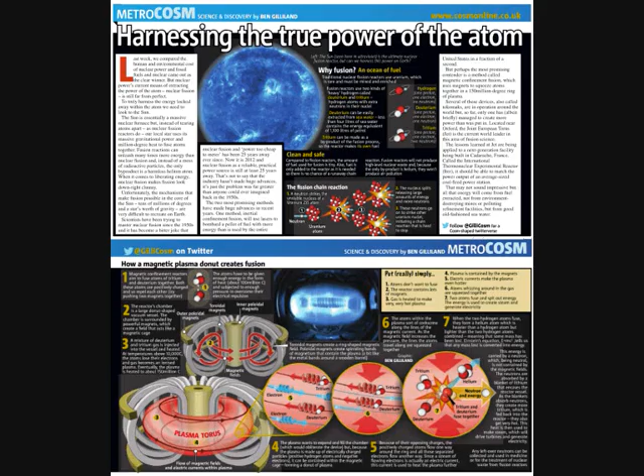Recent news suggests German scientists may have had some success with fusion, which in theory mimics the power of the sun to produce energy, and does not have some of the dangerous side effects of fission, although holding a small star in place is not easy nor particularly safe.

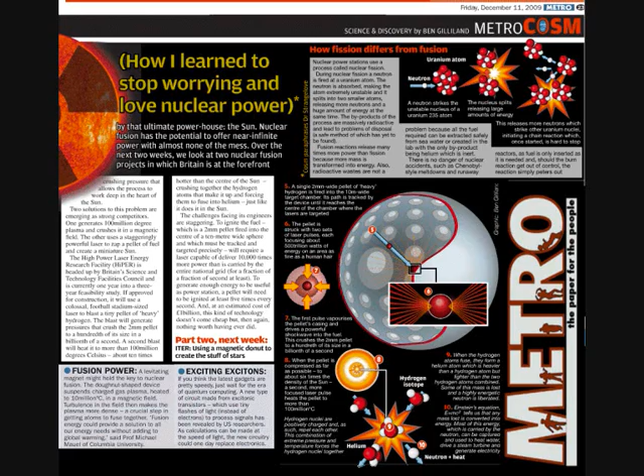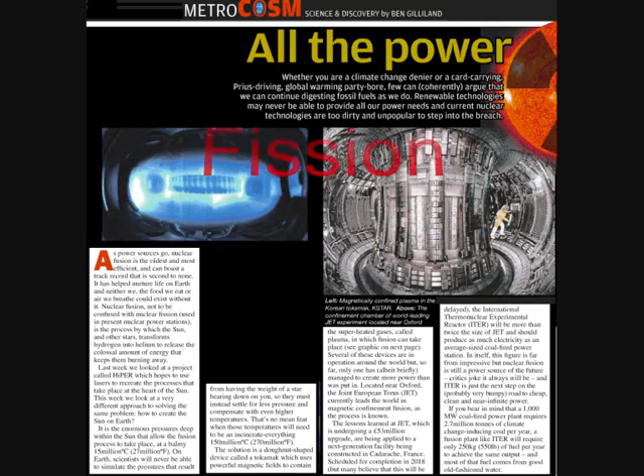We have potentially two types of nuclear system that can supply energy: fusion and fission. Fission creates radioactive elements that then have to be reprocessed. This also creates a security hazard, as nations can use this to create nuclear bombs.

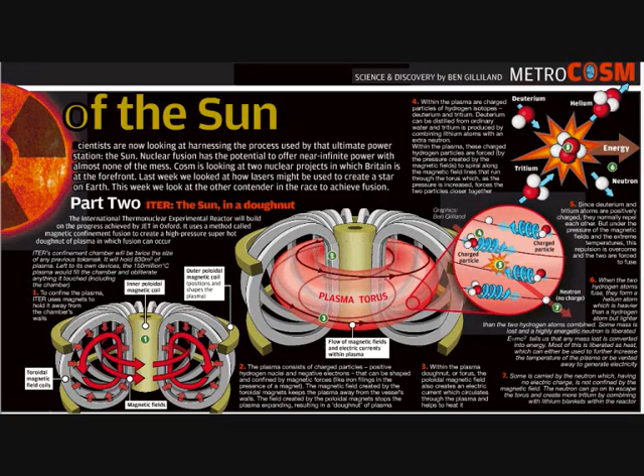Fusion exploits the power of the sun to supply nuclear energy and works in the same way as our star. In principle, this is a better system, but no one has managed to render it stable and usable except for Tony Stark.

The national power grid also keeps people beholden to the power companies, and there is no way one can put a nuclear power station in one's own back garden. So in order to get away from centralized control, and in order to supply energy that will always be available, we need renewable sources now, not when someone comes along with the genius of Tony Stark.

We cannot wait. According to physicist Brian Cox, even if we had fusion power available, this still would not supply the energy needs for the future.

Local personal energy supplies are off-grid. Both remove centralized control and paying bills, and are far more efficient because sending central power around the grid loses energy through kilometers of cable resistance, which is why it is thousands of volts when it leaves the source and hundreds of volts when it reaches homes, and has to be reduced again to power most electronic equipment to 12 volts or so, losing power to heat in the process.

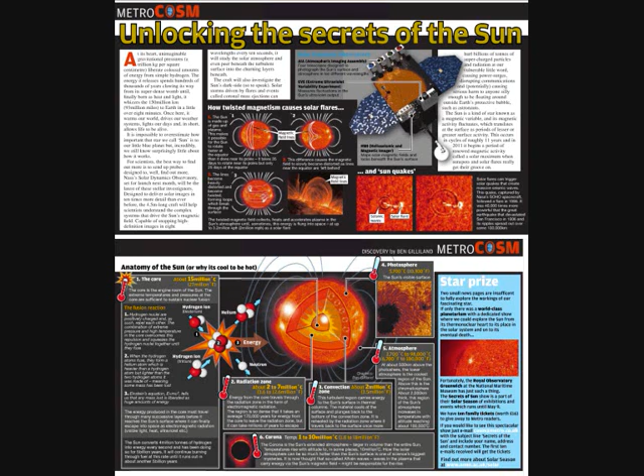Renewable power never runs out, doesn't lose power to a grid, and is therefore more efficient. It stops ongoing bills from having to be paid, though it may require initial investment.

Renewable power is fairer for the individual and enables them to control their own power use rather than being dictated to by large corporations. Indeed, one can end up selling excess power to the national grid and profiting from one's own production.

There are some difficulties involved in going off-grid, including the initial financial investment and planning permission. Notably, some of the processes involved in creation of such things as solar panels and wind turbines involve metal and plastic processing, which themselves rely on oil and electricity for production.

It may be that we have to return to building from wood as ancient water wheels were, which is replenishable.

One of the benefits of renewable power is it needn't be part of the national grid. It could be solar panels on a single house in the middle of nowhere, a windmill on a farm, or it could be actually attached to the device that it needs to power, as in the case of solar cells on calculators, or indeed a solar-powered car.

Muppet Labs at MTVCA has undertaken some experiments with respect to renewable energy in the fields of wind, hydro, solar and chemical.

Obviously we're not going to mess about with nuclear, although apparently making your own fusion reactor is child's play, not that we are going to attempt it. We will now show some of the experiments that the MTVCA has carried out.

Wind power is now one of the most cost-effective methods of electricity generation and one of the fastest growing. A total of 31,000 megawatts of wind generating capacity had been installed by the end of 2002, about 4 times the capacity at the end of 1997, an annual growth rate of 40%.

The Earth's wind systems are due to the movement of atmospheric air masses as a result of variations in atmospheric pressure, which in turn are due to the uneven solar heating of different parts of the Earth.

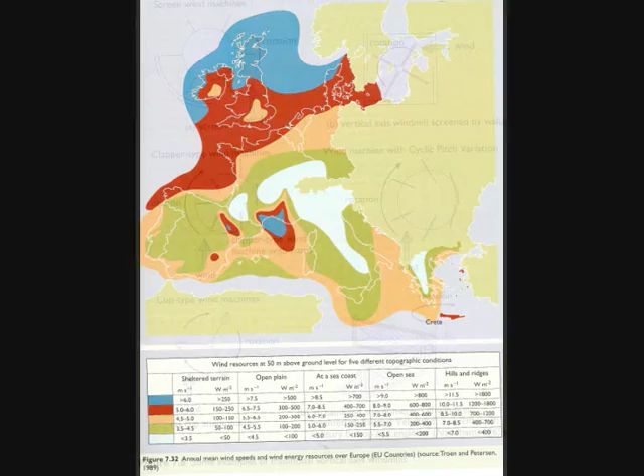Wind energy was one of the first sources of energy to be exploited by early civilizations. Windmills are believed to have existed for over 4,000 years. Many early windmills were of the vertical axis type and had a variety of designs. The more familiar horizontal axis windmills appeared in Europe in the 12th century. These traditional machines consisted of radial arms supporting sails that rotated about a horizontal axis. Before the Industrial Revolution, it is estimated that there were 10,000 of these windmills in Europe.

Modern wind turbines can be of the horizontal or vertical axis type, and a variety of designs have been proposed over the years.

One of the first projects we undertook was to develop a small-scale portable wind turbine suitable for charging AA-size batteries. This device provides an alternative energy source using free energy from the wind. The aim was to construct this using recycled materials as far as possible.

The range of devices which use power in this form is large and growing, from mobile phones and digital cameras to remote controls and battery-powered clocks. We discard millions of batteries every year, and even when we use rechargeable cells, charging them from AC mains is a very inefficient way of using energy, as much of it is lost in the transformer.

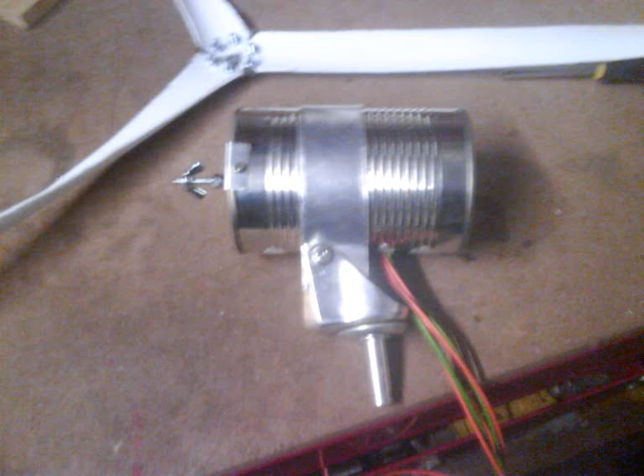Any renewable energy device requires a certain amount of energy to manufacture it, so a key measure of such devices is the return on energy invested. The device has to generate the same amount of usable energy as was used to manufacture it before it starts paying for itself. By making use of recycled materials, less energy has to be invested in constructing the device, and this also gives a new lease of life to discarded materials which would otherwise end up in landfill.

The dynamo is the bottle dynamo type used on bicycles, which can be obtained for a few pounds. The housing for the dynamo is made from packaging containers, standard size food tins, pop bottles, or offcuts of drainage pipe. The blades are made from a length of plastic drainage pipe about 7 cm in diameter and 30 cm in length. The pipe is cut into 3 sections using diagonal cuts, so that the section gets narrower and is offset at the narrow end.

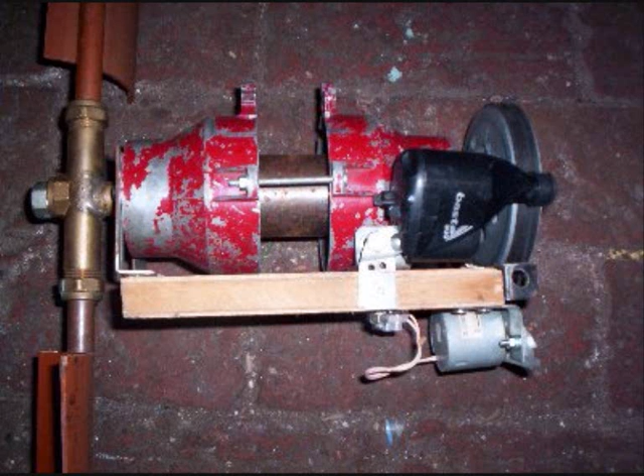This creates a twist in the section which forms the aerofoil. The blades are coupled to the axle by attaching them to a short piece of plastic tube. We want the turbine to be able to pivot horizontally so it can turn into the wind. To achieve this, the housing was mounted on a pivot made from a caster removed from a piece of old furniture. The wheel was removed and the can is fixed to the caster using a band of metal.

A tail fin is made from a piece of sheet plastic and attached to the back of the housing to help the turbine turn into the wind. A small hole drilled in the side of the can where the caster attaches allows the wires attached to the stator coils to exit the housing.

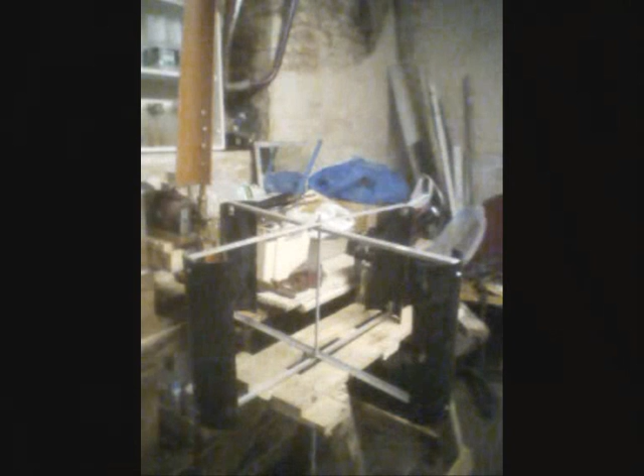The caster is attached to a wooden support pole by means of a hole drilled vertically in the top of the pole. A cross piece provides a base for the support. Guys are attached to the pole near the base using picture hooks. These should be low enough so that there is enough clearance for the rotating blades when the ropes are fully extended.

When the turbine is deployed, the ropes can be secured to the ground to provide stability. The output from the dynamo is alternating current, so a rectifier circuit is required to convert this to direct current suitable for charging a battery. The turbine bought with the You Choose grant has been deployed and is under test, although we don't have a decent regulator for its three-phase supply yet.

Over Christmas 2015, the UK has suffered flooding in many areas. With such large quantities of water dropping, it makes sense to collect it and use it as a source of hydropower.

Over the past few months, what has been evident in the UK is a large amount of wind and truckloads of water, so much water that it has flooded areas of the UK. Some have put this down to housing being built on floodplains, which is no doubt true, and that the government has been lax in dredging rivers, which is also true.

What may also be the case is that the floods are the consequence of global warming, which has caused sea levels to rise, raising the level at inlets and at the coast. It is relatively safe to say then that the UK has sources of wind and water in abundance, and along with the turbines collecting wind, we can have water wheels gathering power from water sources.

Moving water was one of the earliest energy sources to be harnessed. Irrigation systems existed at least 5,000 years ago, and it seems likely that the earliest water-powered device was the noria, used to raise water for this purpose. This device appeared in the Middle East and Far East earlier than 600 BC.

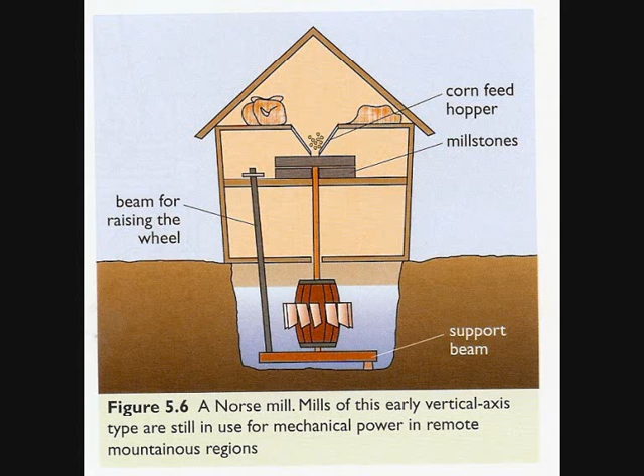The earliest water mills were probably vertical axis corn mills known as Norse or Greek mills. These appeared during the 1st century BC in the Middle East and a few centuries later in Scandinavia. In the following centuries, increasingly sophisticated water mills were developed throughout the Roman Empire, the Middle East and Northern Europe.

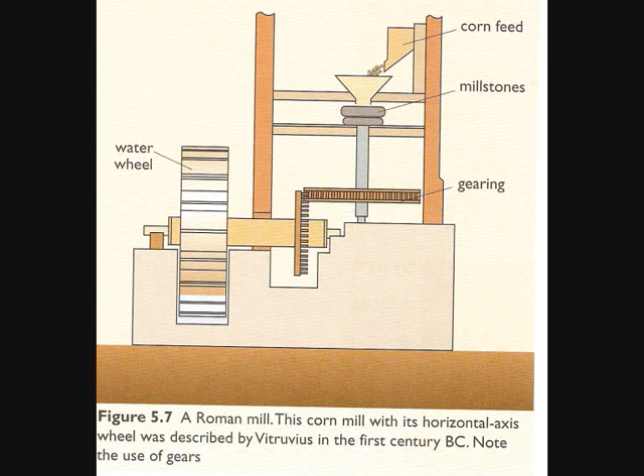The Domesday Book recorded over 5,000 water mills, suggesting that every sizable settlement had its own mill. During the following centuries, water became the main source of mechanical power for mining, ironworking, papermaking, and the wool and cotton industries. By the end of the 17th century, England had 20,000 working mills.

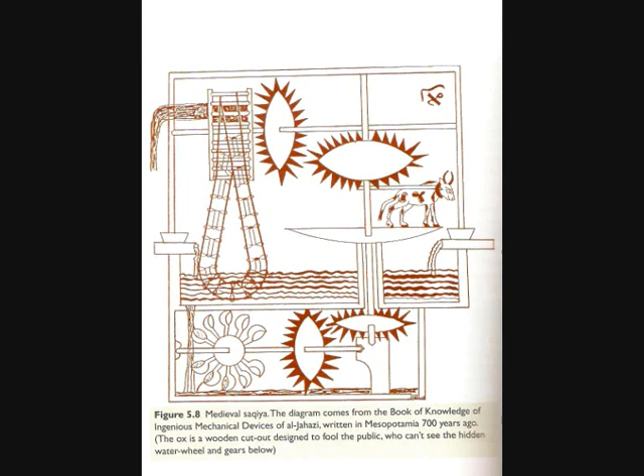Up until about 1800, investigations were made into different designs. The overshot wheel is driven by water falling from above, on blades with closed sides. It requires a head of water at least as high as the wheel diameter. The undershot wheel is driven by the pressure of water against its lower blades, which dip into a flowing stream. It can be run from almost any stream, but becomes inefficient if the water backs up due to flooding.

The breastshot wheel has the water channeled so that it strikes the blades at about the level of the wheel axle. It is a compromise between the two and overcomes the flooding problem without requiring such a high head as the overshot wheel. A number of developments took place in the 19th century, which led to the development of hydroelectric power.

In 1832, a French engineer named Benoit Fourneyron developed the first successful water turbine. This was a vertical axis machine in which the turbine runs completely submerged. Guide vanes inside the turbine direct the water flow onto the moving blades, ensuring the smooth flow of water, resulting in an efficiency of as much as 80%.

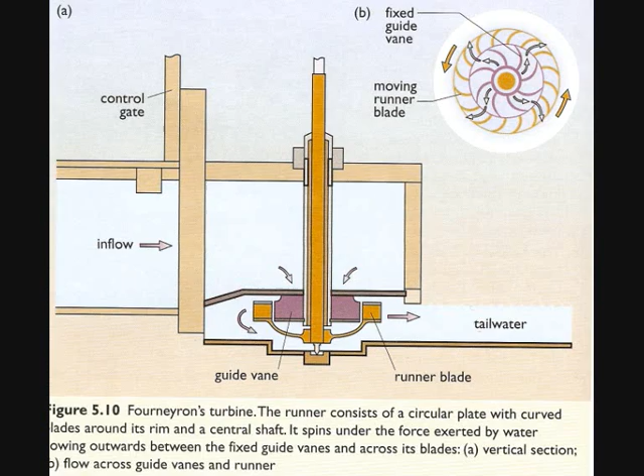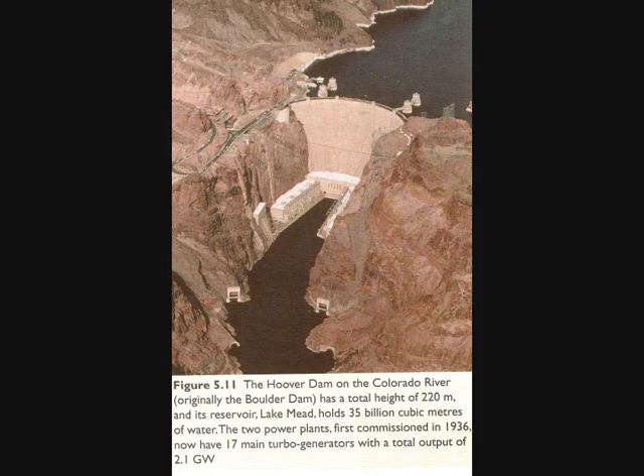By 1881, the world's first public hydroelectricity supply opened in Godalming in Surrey. The capacity of individual power stations grew to over a megawatt in less than a decade, and hydroelectric generation continues to expand today.

We have built a Pelton wheel from an old bicycle wheel and got this turning from a flow of water, supplied from a tank at the top of the hill, which collects rainwater runoff from the garage. The idea is to get this to turn a dynamo. Calculations suggest it should generate about 5 watts.

Doing it now. Got it? Yeah.

The problem with the water wheel is that the tank of water powering it is soon exhausted. In order to improve the situation, the arrangement can be enhanced using a pumped storage system.

Water from the garage roof is collected into the IBC tank to act as a source of water for the Pelton wheel.

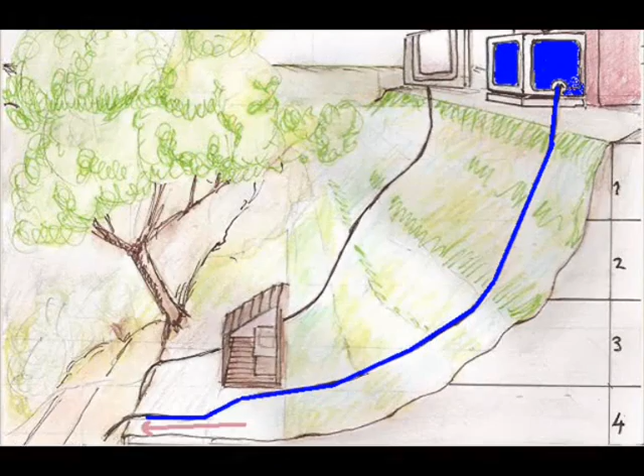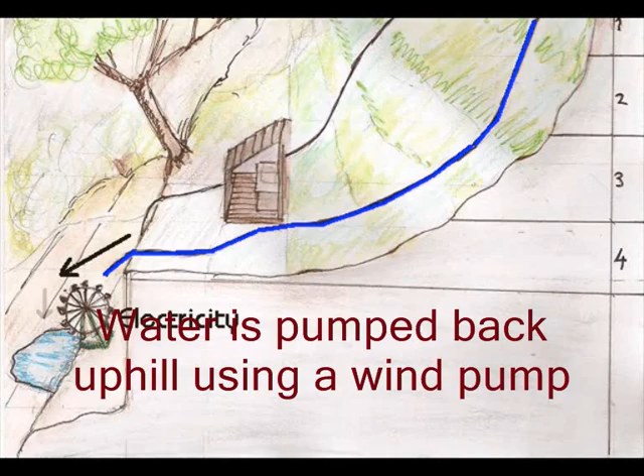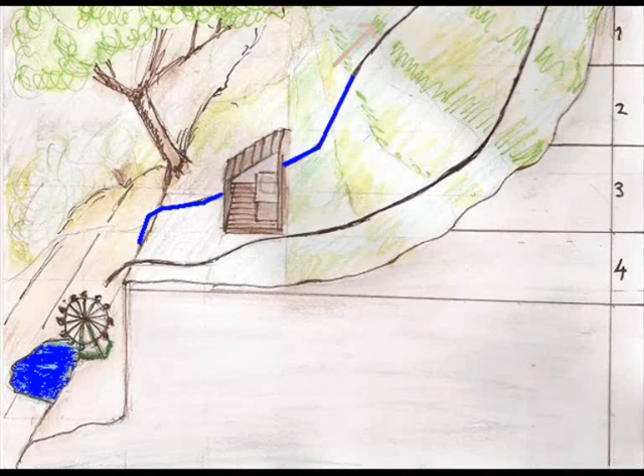Water flowing downhill from the tank initially is used to drive the dynamo in the Pelton. A wind turbine is used to pump water uphill to the tank, recreating the potential energy and resupplying the Pelton with its driving force of water. This uses wind to recover water lost from the tank in order to be released again to power the dynamo in the Pelton wheel to produce electricity. This is then stored in batteries to be tapped at will.

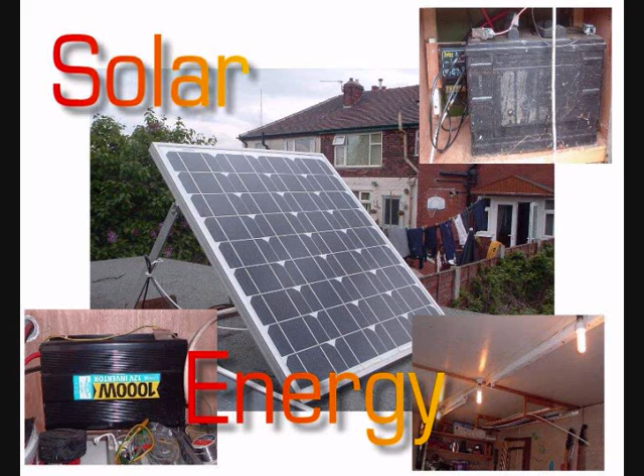There are several ways to use the sun's energy, but the MTVCA invested in 2 solar panels using the U-Choose grant, which now adorn the headquarters.

The discovery of the photovoltaic effect is credited to French physicist Edmond Becquerel, who described an experiment in 1839 in which the voltage of a battery increased when light was shone on the silver plates of the cell.

In 1877, two Cambridge scientists, W. G. Adams and R. E. Day, described variations in the electrical properties of selenium when exposed to light.

In 1883, Charles Edgar Fritts constructed a selenium solar cell similar to the silicon solar cells used today. These cells were very inefficient, converting less than 1% of the light into electricity, but they did find a use in photographic exposure meters. The breakthrough which led to modern solar cells came in the 1950s.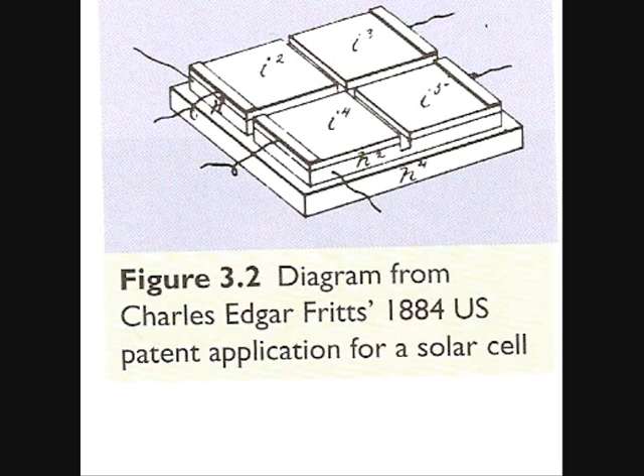A team of scientists at Bell Telephone Labs were researching the effects of light on semiconductors. In 1954, the team produced devices made from silicon which were much more efficient than earlier devices in producing electricity from light. Over the past few decades, progress has been made in improving the efficiency and reducing the cost of PV cells to the point where they can be used commercially.

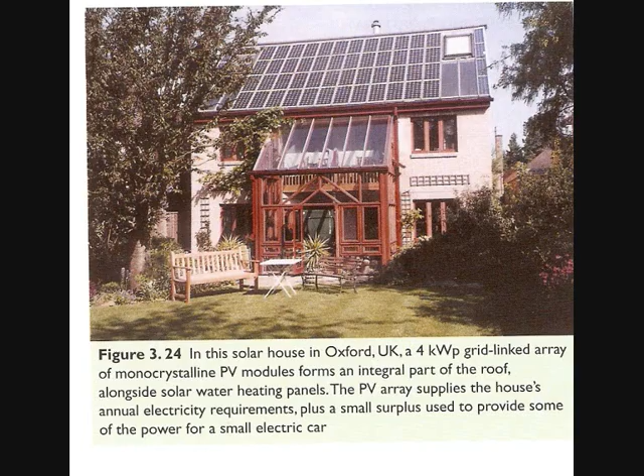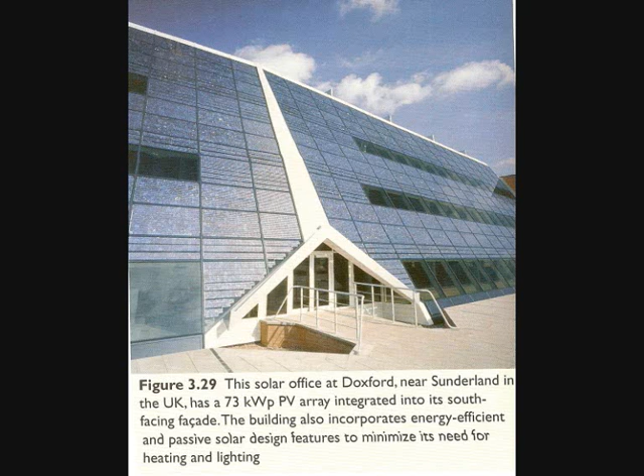A growing number of domestic, commercial and industrial buildings now have PV arrays providing a substantial portion of their energy needs. As early as 1958, solar cells were used to power the radio transmitter of the American Vanguard satellite, and have become the standard power source for modern spacecraft such as the International Space Station.

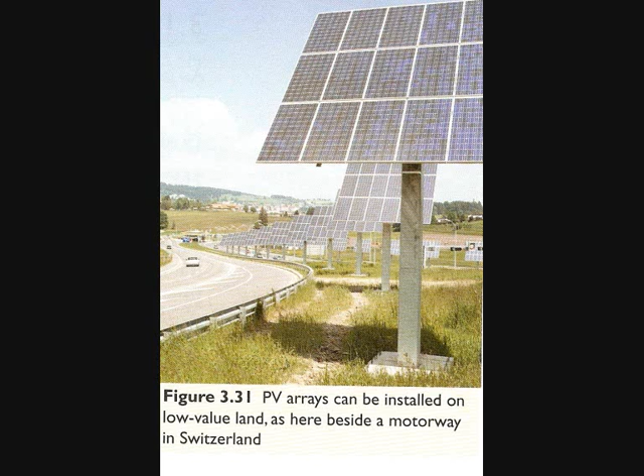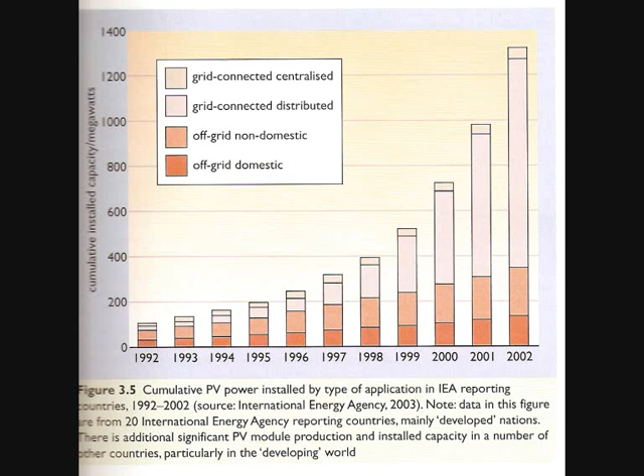As costs have fallen, the amount of installed solar generation has increased, and this trend seems likely to continue in the future. One way to make use of solar power is with photovoltaic cells. These rely on the effect of semiconductor materials to convert the energy in sunlight into electricity.

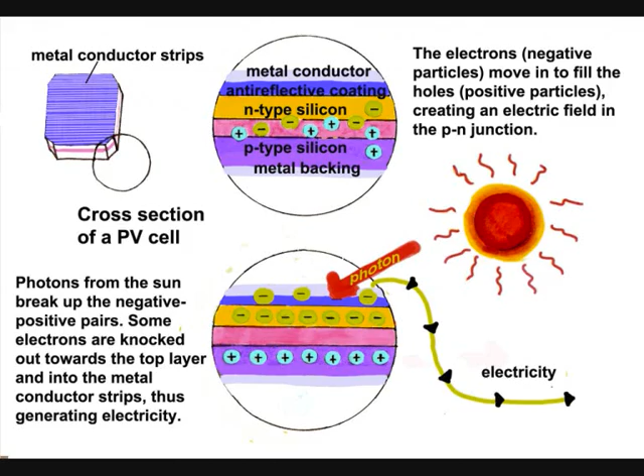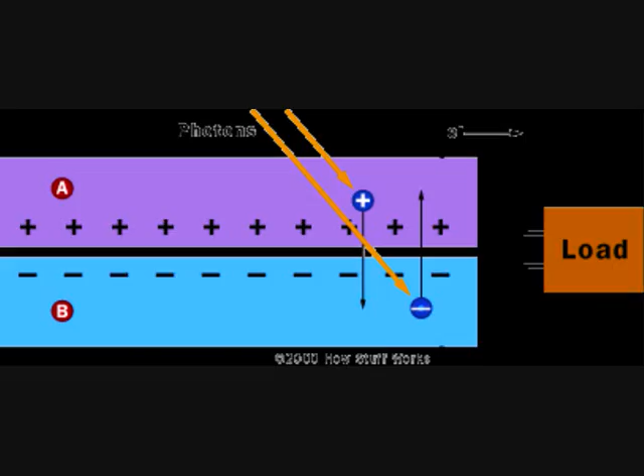A variation on this idea is the photogalvanic cell, which was developed in the 1950s. In these devices, the energy of sunlight is used to reverse the effect of chemical reactions in the battery, causing it to recharge. They have the advantage of storing energy, but so far they have not been developed to the point where they can be used commercially.

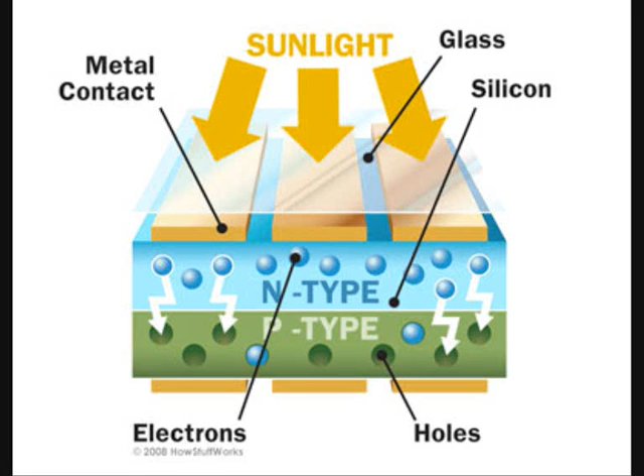With the U-Choose grant given to the MTVCA, we were able to purchase two 80-watt solar panels which were erected on the front of the house. These feed down into the cellar and into a control box which is being fabricated from an old amplifier.

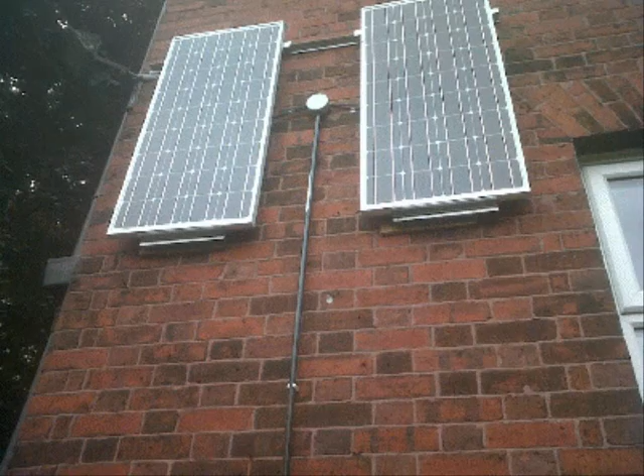Currently, one solar panel is charging the main battery which powers the LED lamps in the cellar. The case is merely a housing for experimental circuits, but at the moment is able to charge small batteries which light the hide and sheds in the garden.

Shortly the lighting in the stairwell to the basement is to be replaced by efficient LED lights. There are also small solar arrays, one of which was used at the U-Choose presentation in order to secure the grant.

If the sun's rays are concentrated using mirrors, high enough temperatures can be generated to boil water to drive steam engines. These can be used to provide mechanical work for electricity generation. These systems have a long history, and if cheap oil and gas had not appeared in the 1920s, solar engines might have developed to be commonplace in sunny countries.

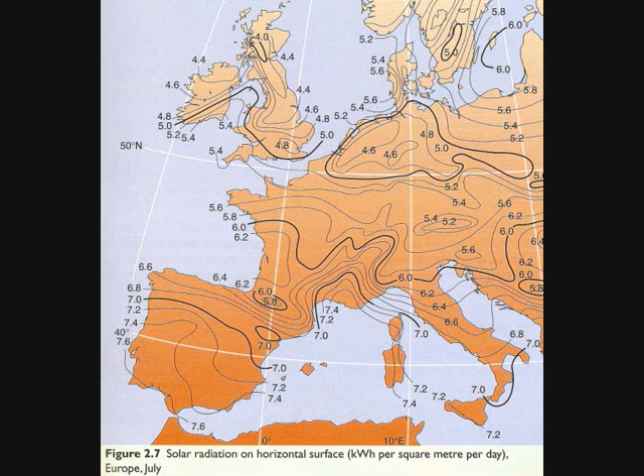The most common method of concentrating solar energy is to use a parabolic mirror. All rays of light that enter parallel to the axis of a mirror formed in this particular shape will be reflected to one point, the focus. If the rays are off-axis, they will not pass through the focus, so it is necessary for the mirror to track the sun. These mirrors can be made in either line focus or point focus.

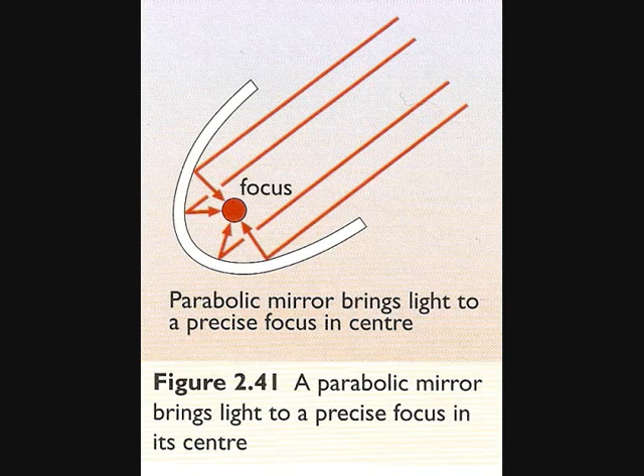In the line focus or trough collector, the mirror faces south and only has to track the sun's elevation. In the point focus form, the mirror must track the sun in elevation, up and down, and in azimuth, side to side. The process of converting this power into mechanical work started in the 19th century.

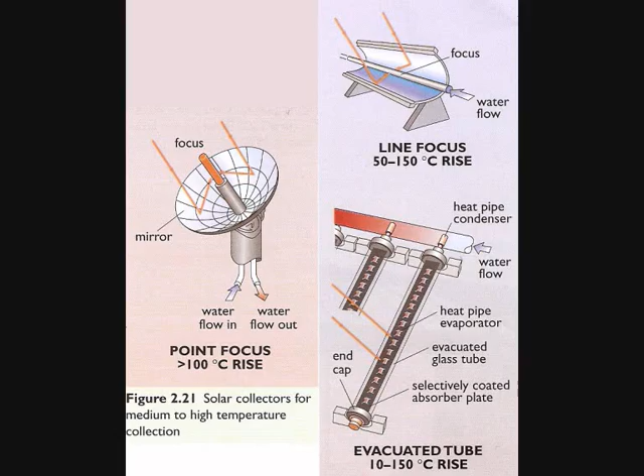In the 1860s, France lacked a supply of cheap coal. Math professor Augustin Mouchot had the answer: solar-powered steam engines. Mouchot produced engines ranging from a solar printing press to solar wine stills, solar cookers, and even solar engines driving refrigerators. The system had a parabolic reflector with a boiler at the focus. However, the engines were not very efficient, and by the 1890s could not compete with supplies of coal appearing as the result of new investment in mines and railways.

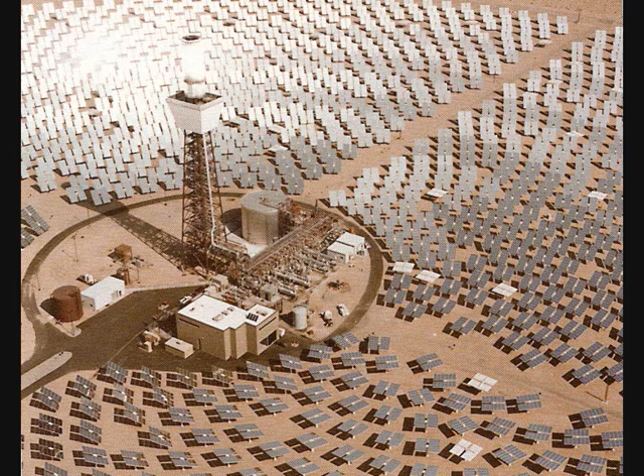At the beginning of the 20th century, an American entrepreneur, Frank Shuman, built a system of large trough collectors in Egypt. This used 5 trough collectors 80 meters long and 4 meters wide. At the time, coal was expensive in Egypt because it had to be imported, so the system would have paid for itself in just 4 years.

A more ambitious scheme involving 20,000 square miles of collector in the Sahara was planned. This would have produced 270 million horsepower, equivalent to all the fuel mined in 1909. Unfortunately, the First World War and the advent of cheap oil put an end to interest in this scheme.

It was not until the 1980s that the first serious large experimental electricity generation schemes were built to make use of high temperatures. Many of these were of the central receiver or power tower type, such as the 10 megawatt system at Barstow, California. The system uses an array of tracking mirrors which concentrate the sun's energy onto a boiler at the top of the central tower.

A power station at Kramer Junction in the Mojave Desert generates electricity commercially and produces most of the world's solar electricity. Between 1984 and 1990, Luz International brought online 9 systems of between 13 and 80 megawatts. These are trough collectors along the lines of Shuman's original design from 1913.

Instead of conveying the steam from the collector to a separate engine, some systems have the engine itself mounted at the focus of a parabolic collector. This can be a steam engine or a Stirling engine.

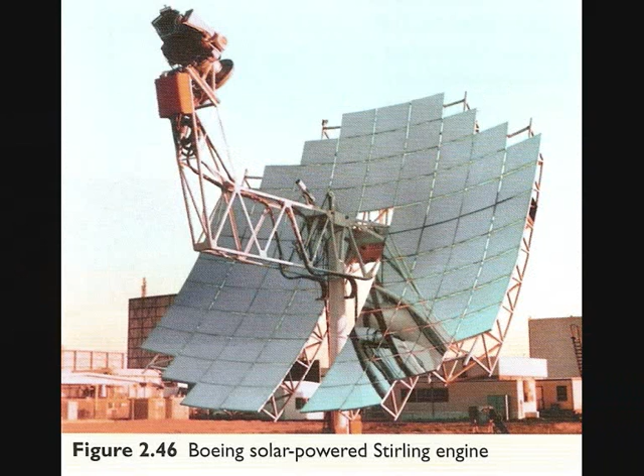The Stirling engine was invented by Robert Stirling originally to provide a safer alternative to steam engines, then being used to provide pumping for mining operations. The Stirling engine is an example of an external combustion engine. The engine consists of a hot and cold chamber, each of which has a piston, and the pistons are connected by a linkage mechanism which turns a flywheel.

Heat is provided to the engine by an external heat source which causes the air inside the hot chamber to expand. This moves the piston, causing the flywheel to turn. The hot air is drawn into the cold chamber where it cools and contracts, drawing in the second piston. This turns the wheel further, forcing the cooled air back into the hot chamber to start another cycle.

In more recent years, this principle has been adapted so that the heat is provided by a solar concentrator, and the engine turns a dynamo providing electrical power. Such systems have been exploited commercially, for example by Sunpower in the US, to provide renewable energy.

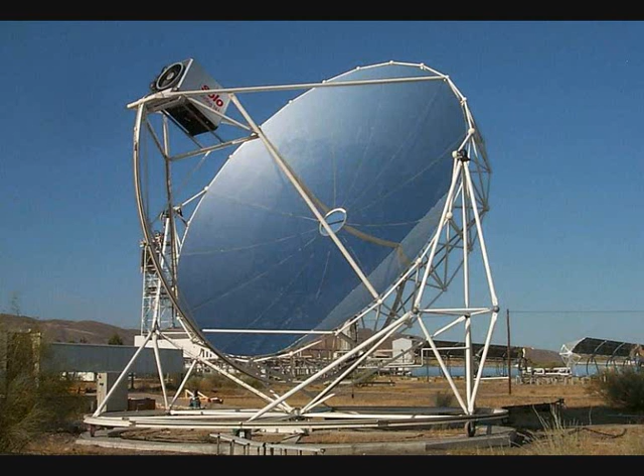These devices use a solar concentrator to focus the heat of the sun. We have made a solar concentrator from an old satellite dish covered in mirror tiles, which has proved quite effective.

A variation of the Stirling engine is the liquid piston engine or fluidine. In these devices, the pistons are formed from columns of water. They can be driven by the heat of the sun and have been used to pump water. Our own attempt at a fluidine is still a work in progress.

Another way to exploit the heat of the sun is to have it heat water up in radiators that are painted black in order to absorb its energy. In doing this, we've managed to attain water temperatures of around 50 degrees.

One of the problems facing renewable energy is that the supply is intermittent. The sun does not always shine and the wind does not always blow at the time we want to use energy. For this reason, we need a way of storing energy in a form which we can use on demand in the form of fuel.

One proposed solution to this problem is hydrogen. Hydrogen is a gas at room temperature and can be burned as a fuel in the same way as natural gas, but no carbon dioxide is produced when burning hydrogen, so it does not contribute to the greenhouse effect.

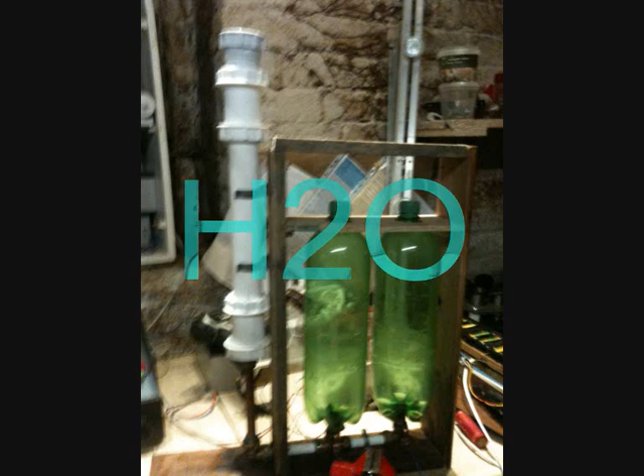The other advantage of using hydrogen is that it can be generated easily from the electricity produced by renewable resources, using a process called electrolysis. Electrolysis uses ordinary water, which consists of the chemical elements hydrogen and oxygen in chemical combination, with the formula H2O. The electrolysis process uses electrical energy to split the water molecule into its component parts, releasing the gases hydrogen and oxygen, which can be stored for later use as a fuel.

When these gases are brought together again, they combine in a combustion reaction, releasing the stored energy as heat. The only byproduct of this is water vapour, which can be safely released into the atmosphere. The heat energy can be used directly to provide heating or used for motive power in an engine or gas turbine. The hydrogen and oxygen can also be consumed in a device called a hydrogen fuel cell, which produces electrical energy directly from the chemical energy stored in that fuel.

The standard laboratory equipment for electrolysis is called a Hofmann apparatus, but you can get the same results using homemade equipment based on simple materials such as a home brew kit or even pop bottles.

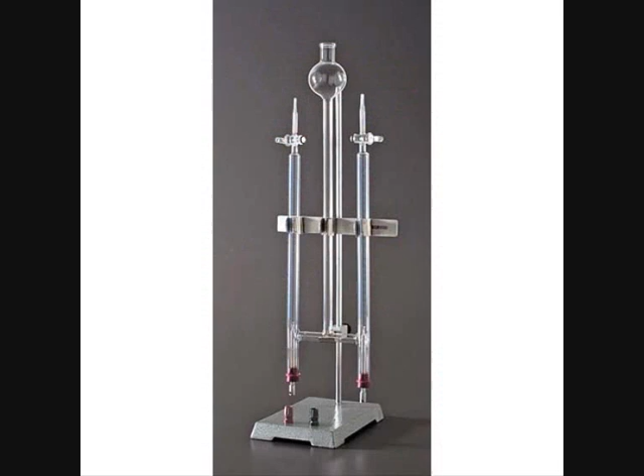As renewable energy sources tend to be intermittent, we need a way of storing the energy so that it can be made available on demand. One way to do this is to store the energy in the form of chemical energy in batteries. In this section we will have a look at how the different kinds of batteries do their job. Electric current consists of the flow of charged particles called electrons through a conductor.

A battery converts chemical energy into electrical energy by means of a pair of chemical reactions. For example, one of the earliest known galvanic cells has electrodes made of the metals zinc and copper. The copper electrode is immersed in a solution of copper sulfate and the zinc electrode in a solution of zinc sulfate. The different metals have a different electrical potential when immersed in solution, so when the circuit is closed, electrons flow from the zinc electrode to the copper electrode,

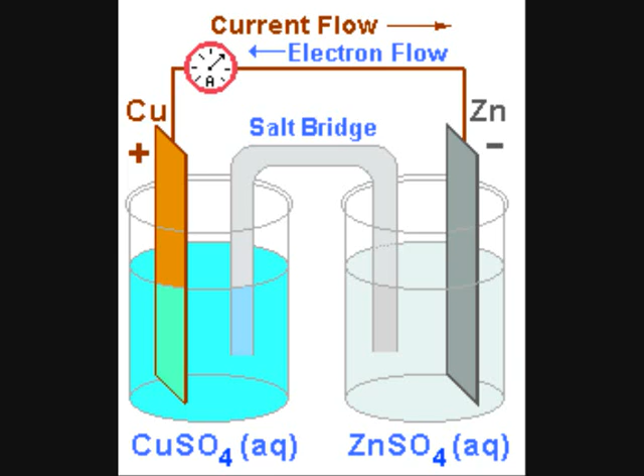providing an electric current. As the zinc loses electrons, it undergoes a chemical reaction forming zinc sulfate. At the other electrode, copper dissolved in the copper sulfate solution accepts the electrons and the copper is deposited on the copper electrode. The two chemical reactions are kept separate by a salt bridge. The chemical reactions provide the energy to drive the electric current. Eventually all the zinc is used up and the cell is spent.

In order to store electrical energy, we need a cell in which the chemical reactions can be reversed by applying an electric current. This provides us with a rechargeable cell. The most common example is the lead-acid battery found in motor vehicles. The lead-acid battery was invented in 1859 by French physicist Gaston Planté and is the oldest type of rechargeable battery.

In this case, one electrode is lead and the other is lead oxide. Both electrodes are immersed in a solution of sulfuric acid. The lead electrode reacts with the acid to form lead sulfate, an oxidation reaction which provides electrons. The lead oxide reacts with the acid also to form lead sulfate, a reduction reaction which accepts electrons. When the circuit is closed, the electrons are transferred, providing an electric current.

Crucially, this reaction can be reversed by applying an electric current in the reverse direction. Energy supplied by the electric current reverses the chemical reactions, converting lead sulfate to lead at one electrode and lead sulfate to lead oxide at the other. This has the effect of storing electrical energy for later use.

An alternative to the rechargeable cell is the fuel cell. In this case, the materials required to drive the chemical reaction are continuously supplied to the cell, which will continue to operate for as long as we have a supply of fuel. A hydrogen fuel cell is an example of this. Hydrogen is supplied to one electrode and oxygen to the other.

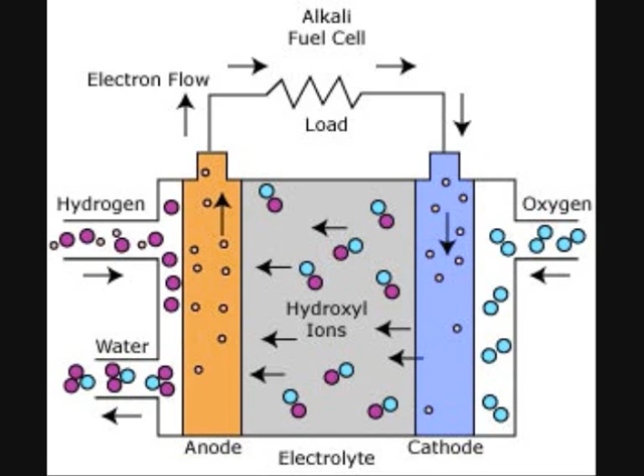A recent Metro article provided the following stats. Wind is Britain's largest source of renewable energy. There are 595 operational wind energy projects in Britain, and 5,425 operational wind turbines.

4,350 are onshore and 1,075 are offshore. The wind projects produce enough energy to power 6.1 million homes. Wind power could be harnessed to meet up to 20% of Britain's electricity demands. The amount of electricity produced by wind increased 38% from 2012 to 2013.

Britain's first commercial wind farm was built in Delabole, Cornwall in 1991. Wind accounted for 7.7% of Britain's sources of electricity generation in 2013, up from 5.5% in 2012. However, this accounts for less than 2% of total energy demand. The government wants renewable sources to provide 15% of Britain's energy by 2020.

Siemens and associated British ports are investing £310 million in British wind turbine factories, creating 1,000 jobs. In February 2014, wind energy generated 11% of Britain's electricity. On February 23rd, wind supplied 17% of electricity demand. 67% of Britons would prefer to have a wind turbine near their home than a shale gas well.

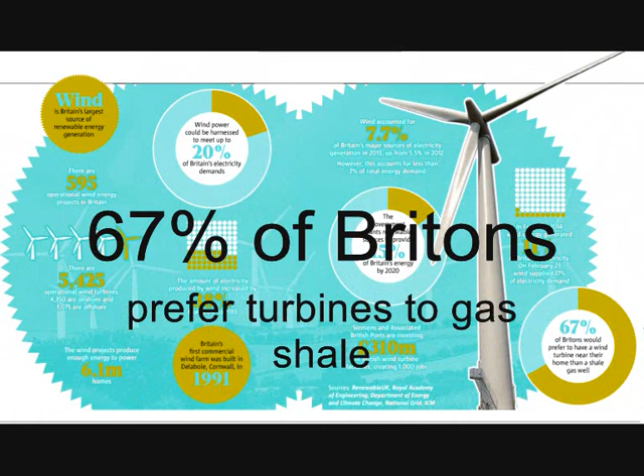These stats were part of an article that made the following points. The Tories are to cap onshore wind farm output. The Royal Academy of Engineering suggested this might lead to less UK investment and higher energy bills.

The Tories believe there are enough people who see turbines as a blight on the landscape and want offshore turbines to please the NIMBYs. An economist at Imperial College pointed to the differential aid available to on- and offshore turbines, and suggested the move to offshore turbines would need the gap in aid to be recovered through higher bills.

In the US, turbines are breaking energy-producing records, largely because they are cheaper than coal and gas. The current move to fracking for shale gas is a short-term fix that will not outlast turbines and solar production.

Two studies have produced opposing results about house prices, one suggesting wind farms depreciate the value, and one saying they do not. The working group suggested it was bizarre to curb turbines and that it was probably a mistake to think fracking would decrease prices.

They stated that most of our energy last winter was from coal-powered stations from the 60s and 70s. The infrastructure is out of date and will be pensioned off without a plan for the future.

The article was followed by a volley of letters. John Davis asks what Mr. Cameron is going to do when oil runs out, and he continues to try and please the NIMBYs. He suggests we all have a turbine of our own, which also reduces atmospheric pollution. He says we should take a long-term view and not be as blinkered as politicians.

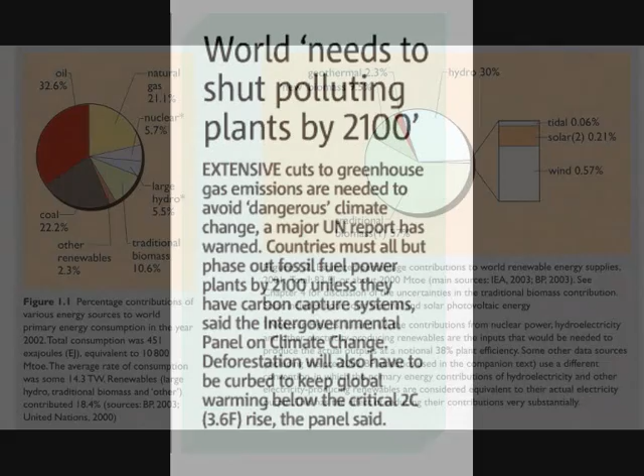Deforestation will also have to be curbed to keep global warming below the critical 2 degrees C rise, the panel said. World consumption of all forms of primary energy increased more than tenfold during the 20th century.

In 2002, this reached an estimated 451 exajoules. Fossil fuels provided 3/4 of the total. At that time, world population was 6.2 billion, so the annual average consumption was 74 gigajoules, equivalent to nearly 6 litres of oil per day for every man, woman and child.

These figures conceal major differences. The average North American consumes nearly 5 times the world average, about 350 gigajoules per year. People in Europe and the former Soviet Union use about half this amount, and those in the rest of the world 1/5. How long will the world's fossil fuel reserves last?

At current consumption rates, proven world coal reserves should last for about 200 years, oil for approximately 40 years, and natural gas around 60 years.

World production of liquid fuels seems likely to reach a peak between 2005 and 2015. Peak production of natural gas is likely around 2030, and from then on will be in decline.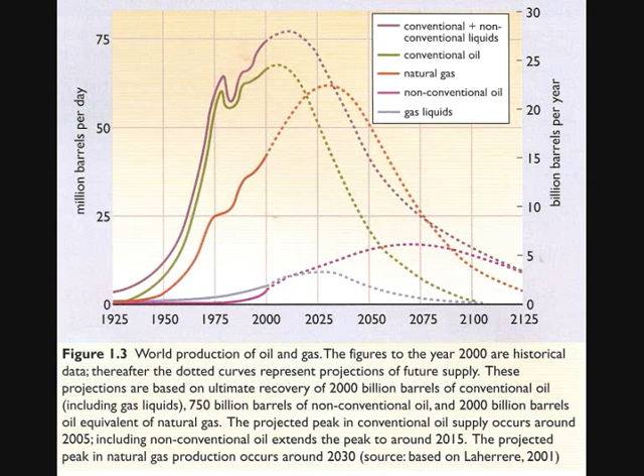The current use of fossil fuels has many adverse consequences, such as air pollution, acid rain, and depletion of natural resources, but we can highlight one major cause for concern: global climate change caused by the emission of greenhouse gases from fossil fuel combustion. The surface temperature of the Earth establishes itself at an equilibrium position where the incoming energy from the Sun balances the outgoing infrared energy re-radiated back from the surface into space.

If the Earth had no atmosphere, its average surface temperature would be minus 18 degrees Celsius. But its atmosphere includes greenhouse gases, principally water vapour, carbon dioxide and methane. These act like the panes of glass in a greenhouse, allowing solar radiation to enter but inhibiting the outflow of infrared radiation. The natural greenhouse effect they cause is essential in maintaining the Earth's surface temperature at a level suitable for sustaining life, around 15 degrees.

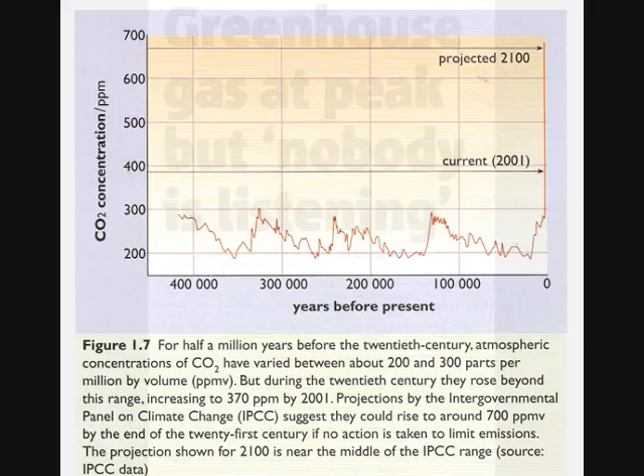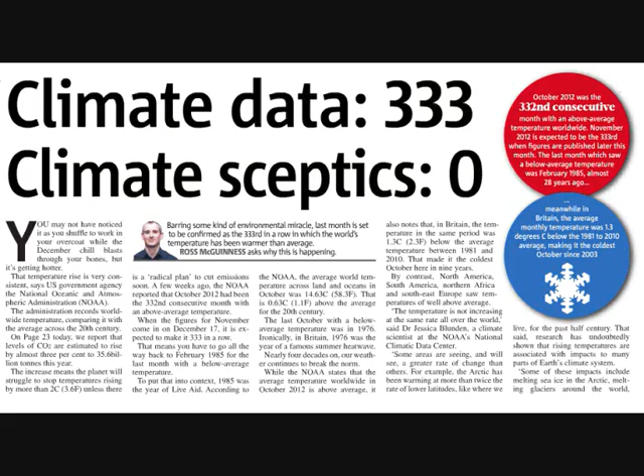Since the Industrial Revolution, however, human activities have been adding extra greenhouse gases to the atmosphere. The principal contributor to these increased emissions is carbon dioxide from the combustion of fossil fuels. Scientists estimate that these human-induced emissions caused a rise of the Earth's global mean temperature of 0.6 degrees during the 20th century. If emissions are not curbed, the surface temperature is predicted to rise by 1.4 to 5.8 degrees by the end of the 21st century.

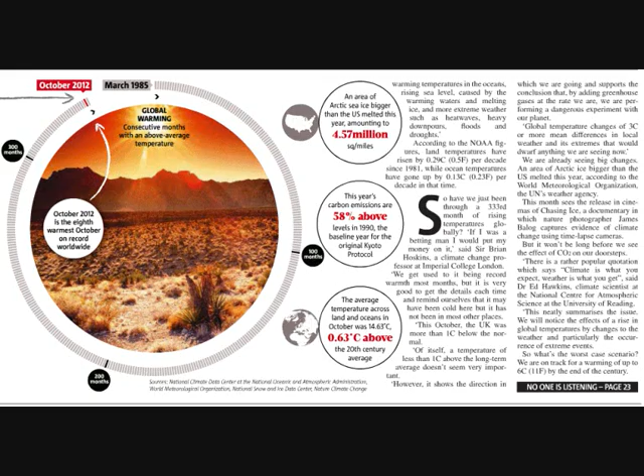Such rises will probably cause an increased frequency of climatic extremes, such as floods or droughts, and serious disruption to agriculture and natural ecosystems. Mean sea levels are likely to rise by around 0.5 metres by the end of the century, which could inundate some low-lying areas. Beyond 2100, much greater sea level rises could occur if major Antarctic ice sheets were to melt.

The threat of global climate change caused by carbon dioxide emissions from fossil fuels is one of the main reasons why there is a growing consensus on the need to reduce such emissions. Reductions in the range of 60 to 80% may be needed by the end of the 21st century, and ultimately a switch to low or zero carbon energy sources such as renewables.

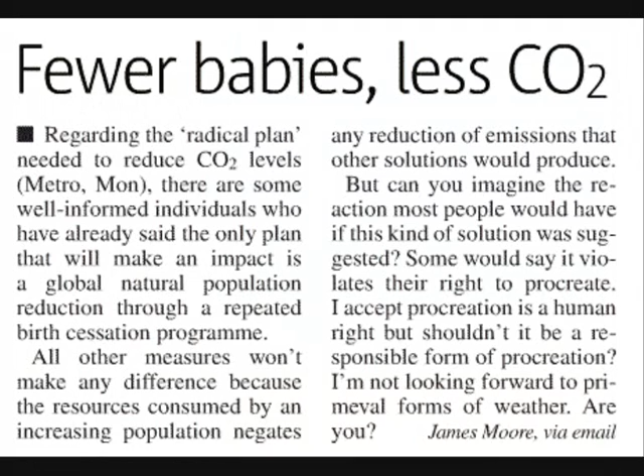The renewable energy sources, derived principally from the enormous power of the sun's radiation, are at once the most ancient and most modern forms of energy used by humanity. Solar power, both in the form of direct solar radiation and indirect forms such as water or wind power, was the energy source on which early human societies were based. Ancient civilizations harnessed the movements of water and wind caused by solar heating of the oceans and atmosphere to grind corn, irrigate crops, and propel ships.

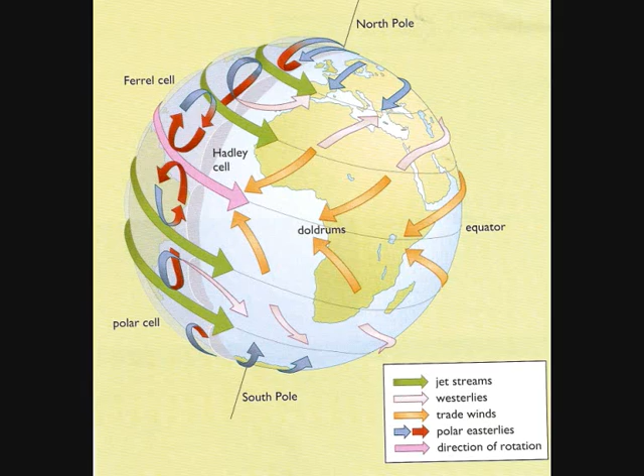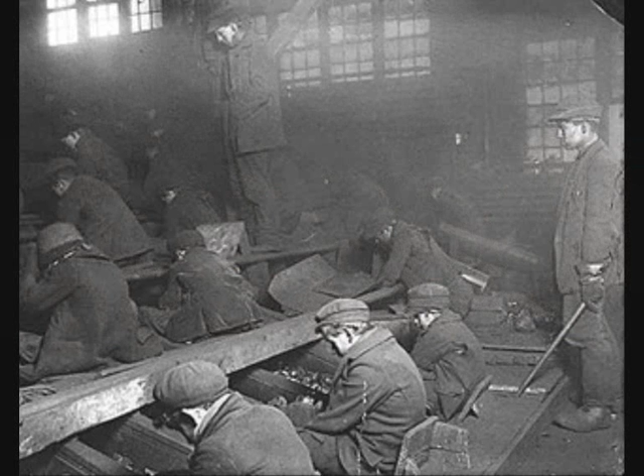Technologies for harnessing the power of the sun, water, and wind continued to improve up to the early years of the Industrial Revolution, but by then the advantages of coal, the first and most plentiful of the fossil fuels, had become apparent. These highly concentrated energy sources soon replaced wind and water power in the homes, industries and transport systems of industrial nations. Today the fossil fuel trio of coal, oil and natural gas provides 3/4 of the world's energy.

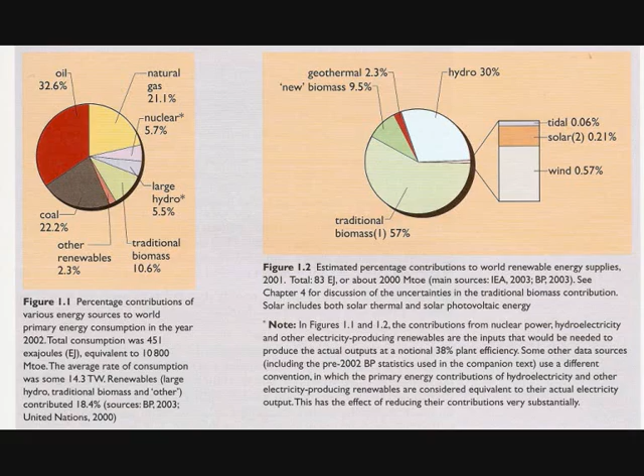However, concerns about the adverse environmental and social consequences of fossil fuel use, such as air pollution and global warming, and the finite nature of supplies, have been voiced intermittently for several centuries. But it was not until the 70s, with the steep price rises of the oil crisis and the advent of the environmental movement, that humanity began to take seriously the possibility of fossil fuels running out, and that their continued use could be destabilizing the planet's natural ecosystems and the global climate.

The development of nuclear energy following World War II raised hopes of a cheap, plentiful and clean alternative to fossil fuels. But nuclear power development has stalled in recent years due to increasing concern about cost, safety, waste disposal and weapons proliferation. Continuing concerns about the sustainability of both fossil and nuclear fuel use has been a major catalyst of renewed interest in the renewable energy sources in recent decades.

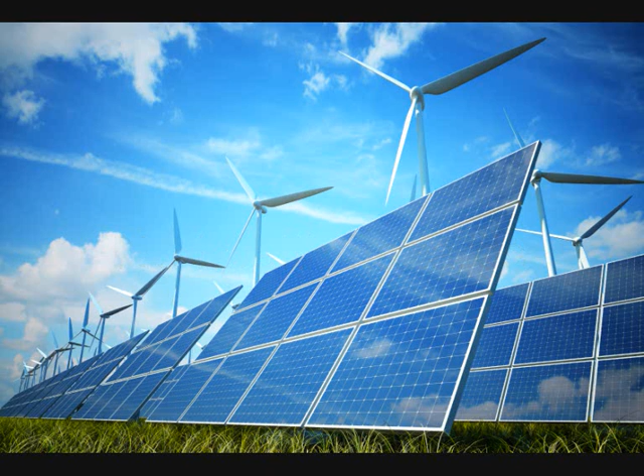Ideally, a sustainable energy source is one that is not substantially depleted by continued use, does not entail significant pollutant emissions or other environmental problems, and does not involve the perpetuation of substantial health hazards or social injustice. In practice, only a few energy sources come close to this ideal. Renewables appear to generally be more sustainable than fossil or nuclear fuels. They are essentially inexhaustible, and their use usually entails much lower emissions of greenhouse gases and other pollutants, with fewer health hazards. So it seems likely that they will form an increasingly important part of our energy mix in the future.